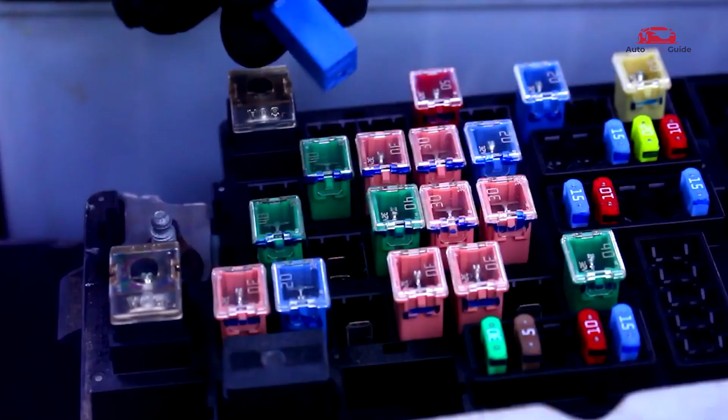Are you trying to locate the fuse box in your 2024 Chevrolet Silverado? Wondering where each fuse is placed or how to read the fuse box diagram correctly? In this guide, we'll walk you through the exact location of the fuse box and provide an easy-to-understand diagram to help you identify the fuses for various systems in your Silverado.

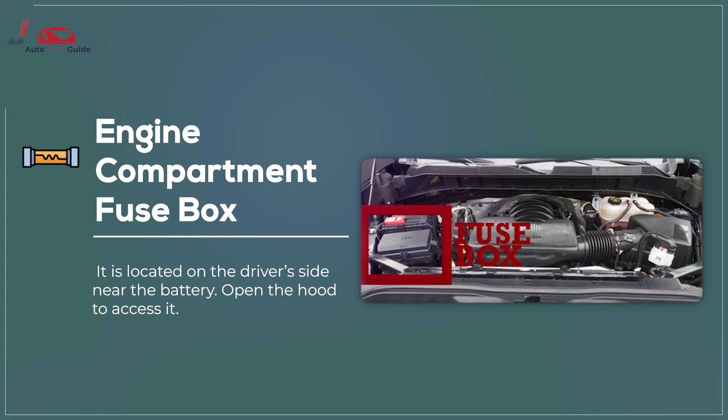Engine compartment fuse block. The engine compartment fuse block in the 2024 Chevrolet Silverado houses key fuses and relays that control essential engine and electrical functions. It provides easy access for maintaining critical systems like the starter, fuel pump, and lighting.

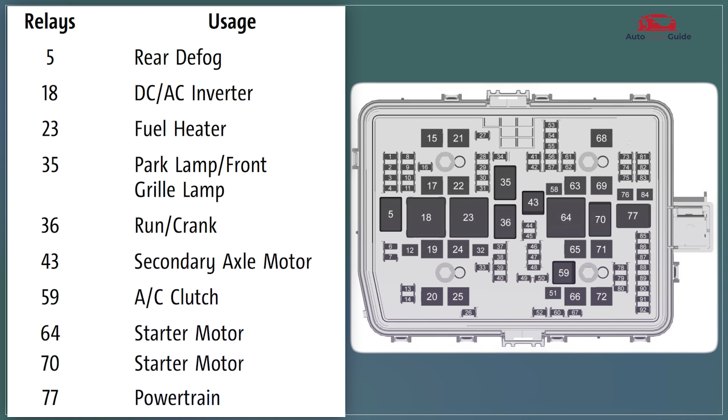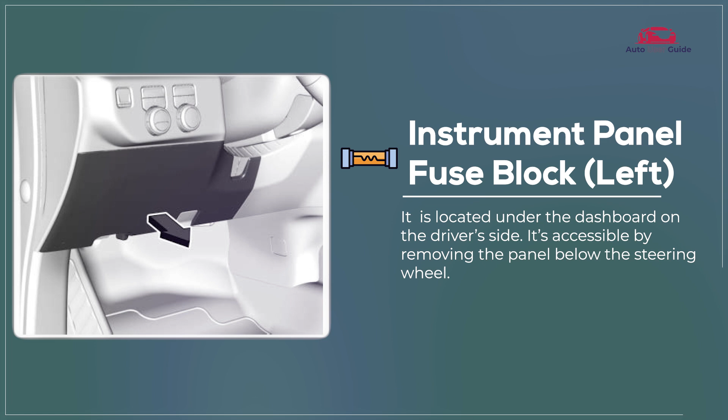Instrument panel fuse block, left. The left instrument panel fuse block in the 2024 Chevrolet Silverado manages interior electrical functions, including lights, power windows, and infotainment. It's conveniently located under the driver's dashboard for easy access.

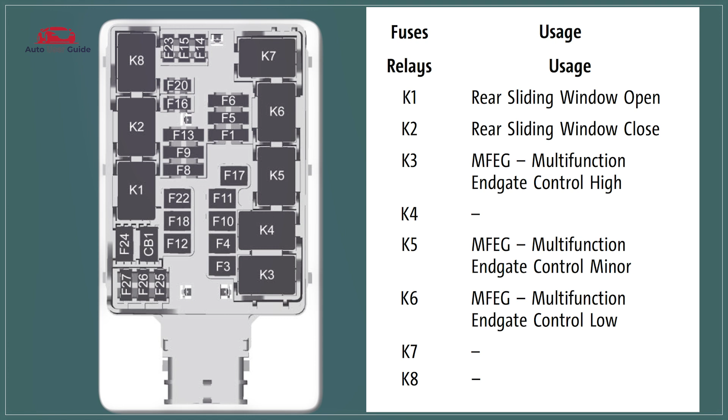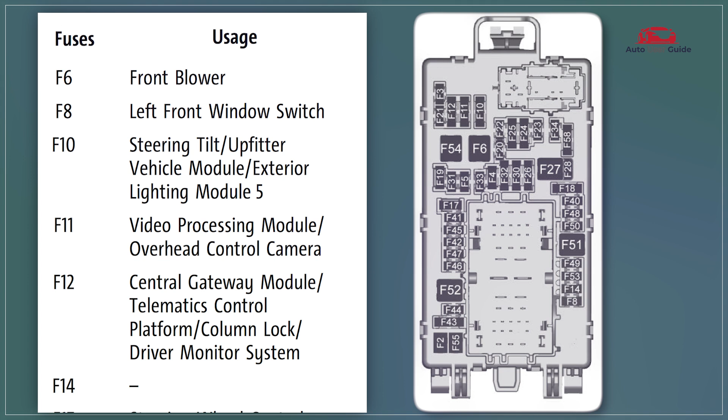Instrument panel fuse block, right. The right instrument panel fuse block in the 2024 Chevrolet Silverado controls various electrical components, such as climate control and passenger side accessories. It is easily accessible behind the panel near the glove box.

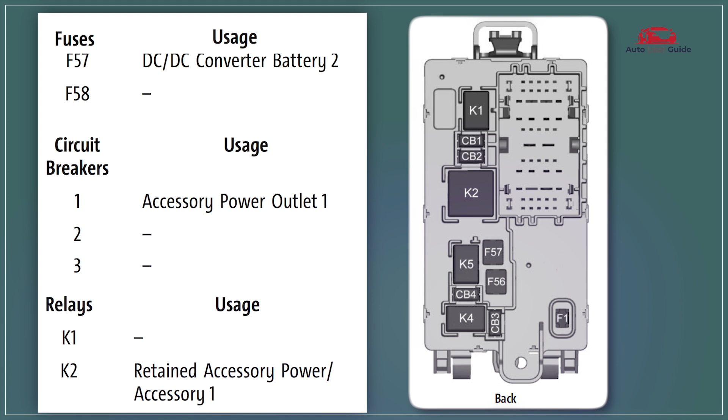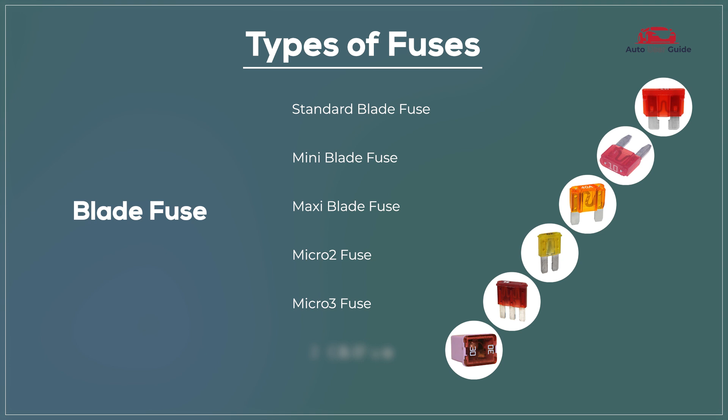Glass tube fuse, AGC fuse, SFE fuse.

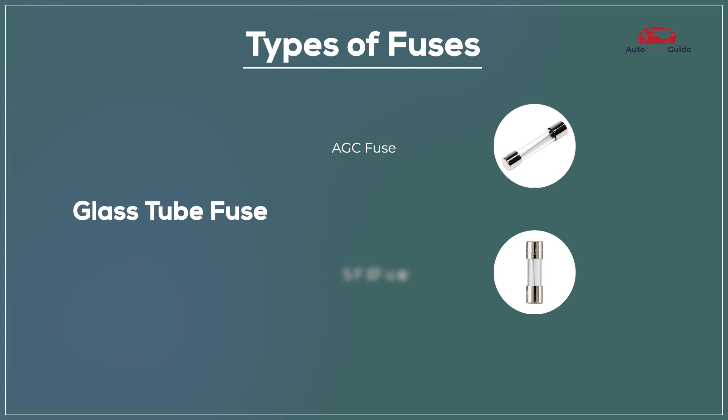Ceramic fuse, Bosch fuse, DIN fuse.

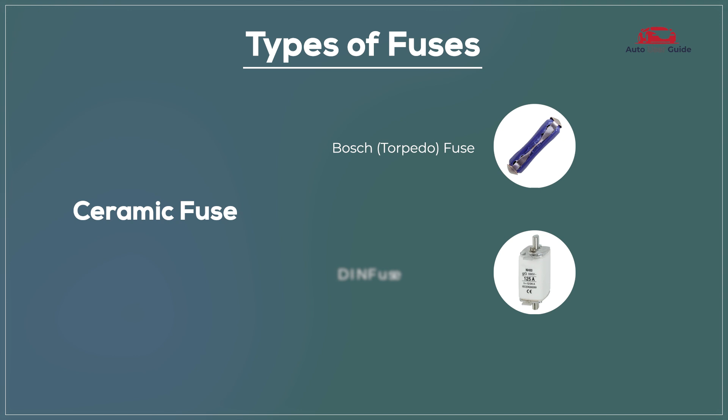PAL fuse, low profile fuse, standard PAL fuse, link fuse, mega fuse, high amperage link fuse.

Fuse conditions: blown fuse. A blown fuse means it's no longer functioning and needs replacement, while a perfect fuse is in good working condition and performing as expected.

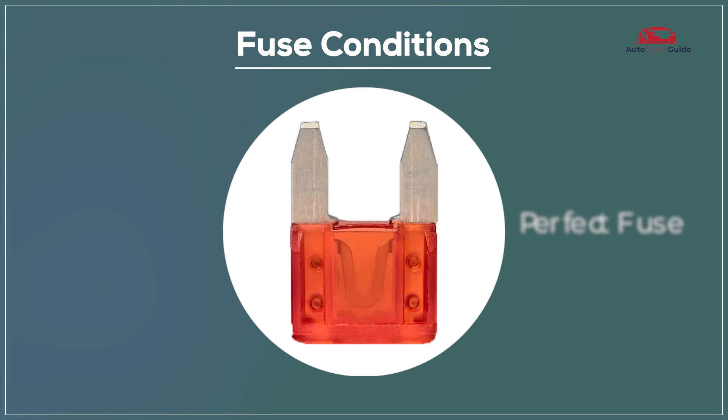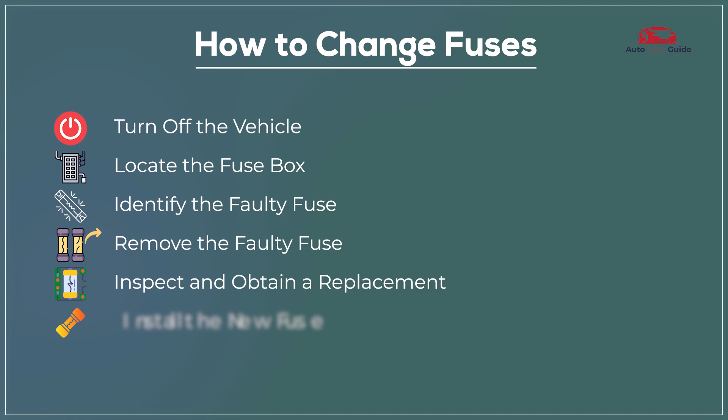How to change fuses: turn off the vehicle, locate the fuse box, identify the faulty fuse, remove the faulty fuse, inspect and obtain a replacement, install the new fuse, test the replacement.

Safety precautions: disconnect the battery, wear protective gear, use proper tools, check for correct amperage, avoid water exposure.